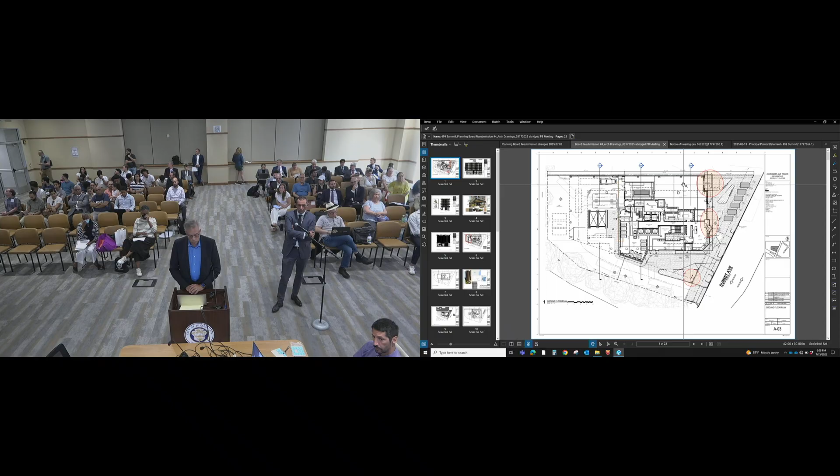This is the ground floor, and what I've circled are the areas where the changes have been made. Towards the top here, an additional retail entry was added. The upper right area here was dedicated for retail - ownership wanted to demise that to allow for the possibility of 2 retail tenants instead of 1. In this area, let me zoom in - we added a canopy to the exterior, which I'll show you in elevation and rendering, and we added a double door retail entry here.

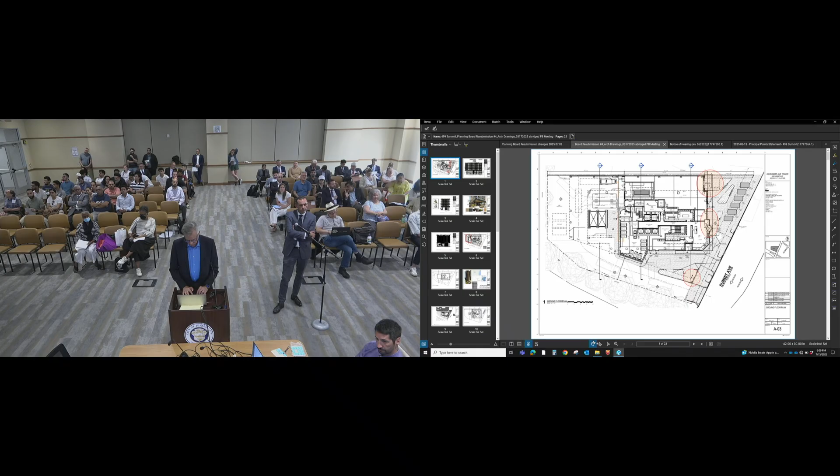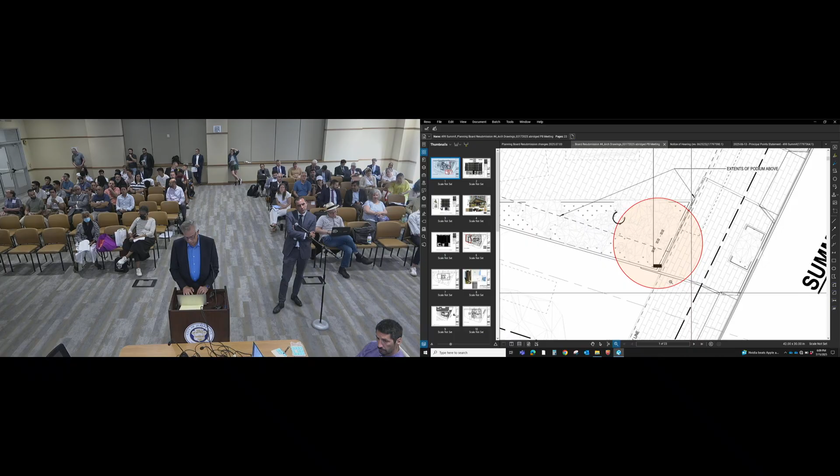Then moving down this east facade, a couple minor changes. Where my cursor is right now is the revised signage that we'll talk about. And this revolving door was just moved slightly so that it's half in, half out of the exterior facade, whereas previously it was all the way inboard. And then finally, if we move down to this area - this is the drop-off, the valet driveway drop-off and entry, and in this island is this piece of monument art, which is part of our signage, and I'll show that in elevation as well.

So if we move to the next drawing, this is an east elevation of the building, looking over the small landscape area to the east facade. To the right here is the added retail entry and retail signage above the canopy. This retail signage and entry was existing - it has not changed. And right here, let me zoom in - this is one of the 2 signs beyond the retail signs that we're seeking the variance for.

I'll just zoom in on that. In working with the branding, graphics, and signage people, they came up with a concept that is much more graphic, much more of a logo.

You'll see the new address 505 here in kind of a stencil cut. So although the area is defined corner to corner, you'll see that with this design, a lot of it is really open area, so it's not quite as big as the overall square footage would suggest.

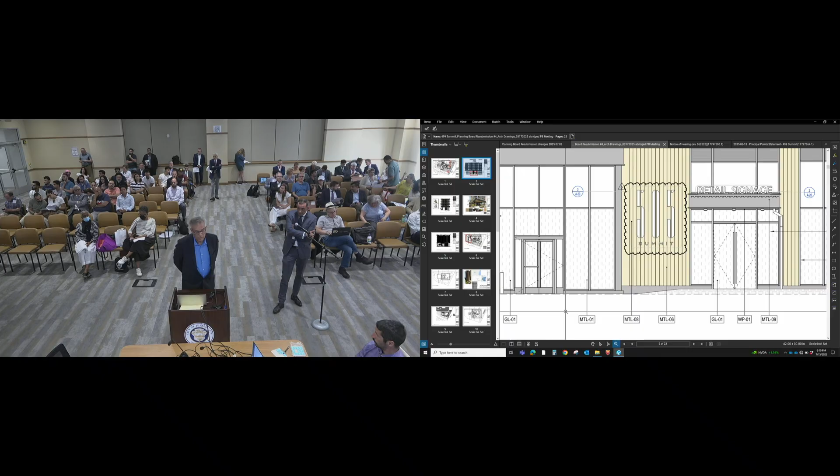Scott, can you talk about how that sign is mounted to the wall, please? Yeah, as is stated in the documents, it's pin mounted. It extends about 3 inches off the face of the building. There's a 1-inch gap between the signage letters and the face of the building, but overall it protrudes about 3 inches.

And that is one of the deviations we're requesting this evening, correct? Because it is not flush mounted, correct? That is correct. And briefly, is that sign lit? It is backlit. It's got a halo effect to it.

And then if we move further to the left, here is where the valet drop-off is, the driveway, and here is the island, and here is the monument sign, or the monument art. It again repeats this same stencil cut vocabulary. It's a metal finish, roughly a light bronze or almost a champagne color. You'll see it in a rendering in a moment.

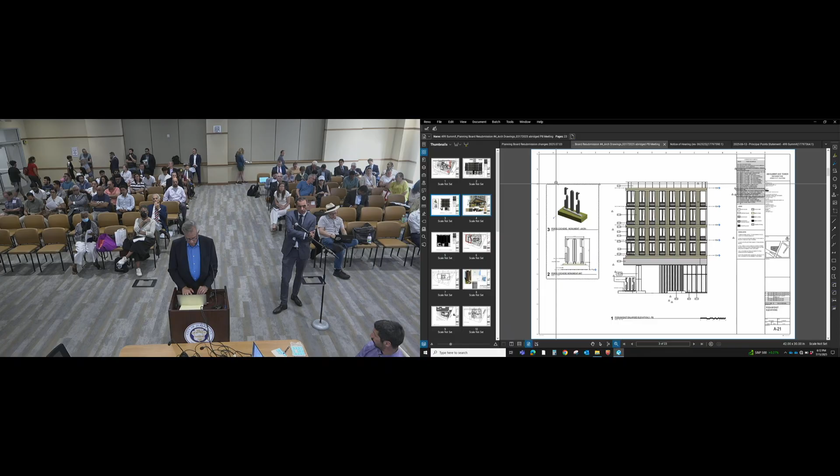And then here's an axonometric presentation of what that looks like. Going to the next sheet, here's a rendered view of what this looks like. In the distance is the new retail canopy. Here's the revolving door protruding out from the face of the building, and then here's the monument art sign in the island.

As you can see, it's very complementary to the overall scheme and color scheme and aesthetic of the building. We believe it's a really nice improvement to the overall appearance from the street. And that monument sign is also one of the deviations we're requesting, correct? That is correct.

That's all I have to show you this evening. I'm happy to answer questions about any of the other elements. I do have the full set of drawings if anybody has a specific question, but they're all minor changes that are either not visible from the exterior or very minor and wouldn't be seen from ground level. Okay, thank you. Any questions from the board?

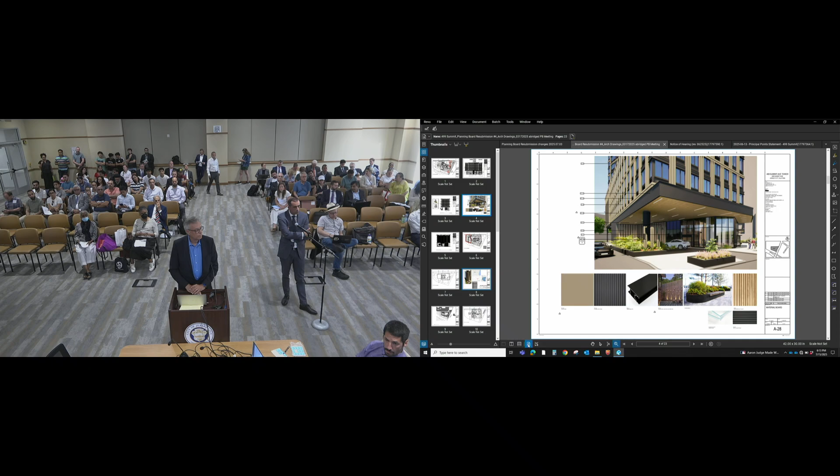Just one, in the written narrative it says the project is proposing an additional retail wall sign for an additional storefront bay as permitted by the redevelopment plan. So that's not included in these renderings, right? Yeah, you don't see it in this rendering. However, in the elevation I showed, that actually refers to this retail sign here. This was not here previously. This retail entry was not here previously. The canopy was not here, and the retail signage was not here. So all of that has been added in this amendment.

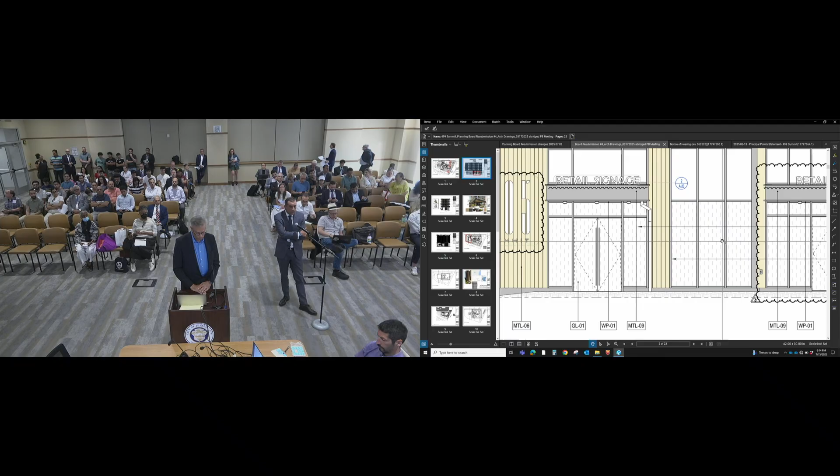And it'll match the design of the other two? Yeah, very similar. If we pan over, it's shown as essentially identical to the signage in the original application. And Commissioner, those are compliant signage per the plan. Should a tenant want to change that, they'll have to petition the city and come back to this board. Thank you, sir.

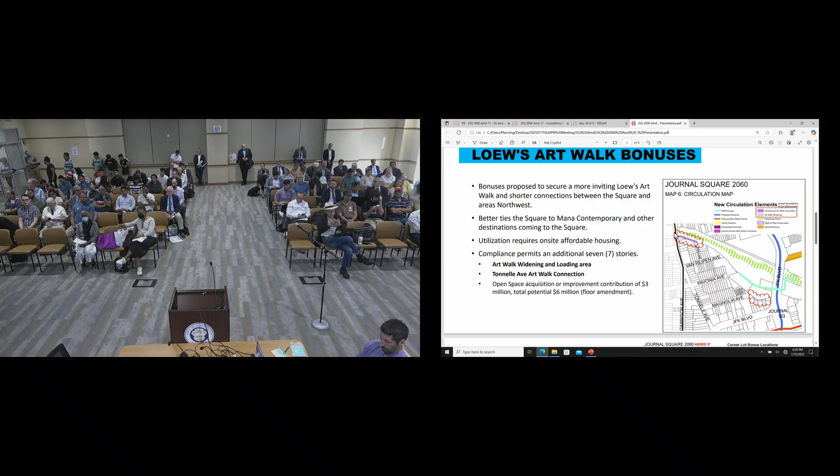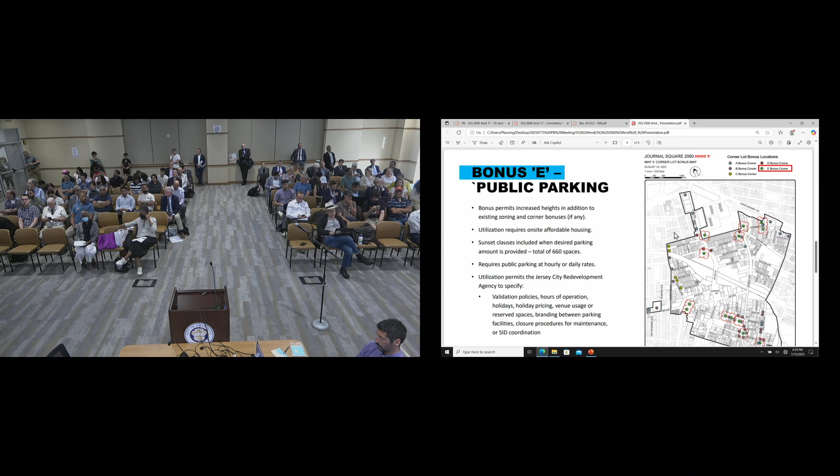When this resolution came to be, one of the items that Councilman Boggiano requested staff look at was a public parking bonus, and so that's incorporated into these amendments. This bonus, known as Bonus E, would permit increased heights for the provision of public parking on site.

This is a bonus that's crafted in a way that would sunset. We're looking for a specific amount of parking, totaling 660 spaces. Once we get to that number, this bonus would no longer be available, even though the map shows it could be in multiple locations. Because it sunsets and the map is populated with all these different options, we don't know where this bonus will be utilized, so we are allowing it in more places just because we don't know who's going to utilize this, or when.

We don't want to see this go on forever, because we think there's a balance we need for public parking. That's one reason the Journal Square 2060 plan has parking maximums rather than minimums. The main goal is to require public parking at hourly or daily rates. Anyone utilizing this bonus would have to coordinate with the Jersey City Redevelopment Agency and specify validation policies, hours of operation, holidays, holiday pricing, venue usage, reserved spaces, branding between facilities, closure procedures, and SID coordination.

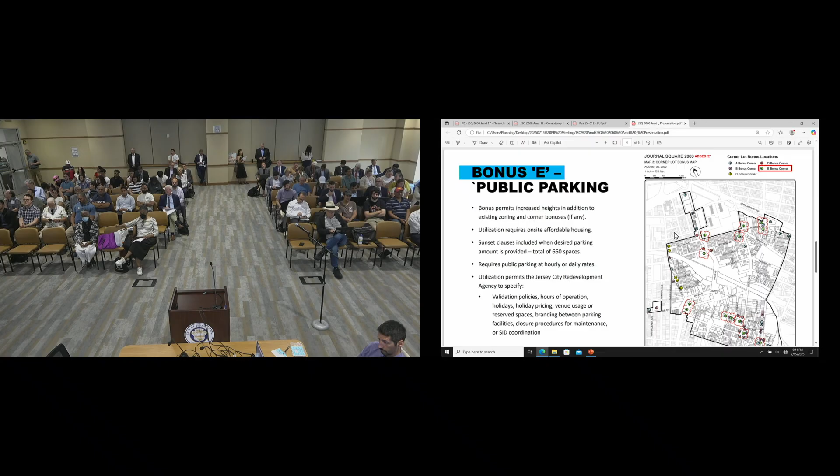I'll explain this last slide before I hand it off to my colleague Matt. We're also making some changes to map 2, correcting for some split lot zones or split lot properties that are under common ownership. Those are referenced in these areas specifically on this map, with bullets to the left here.

In the resolution, it asks us to look at St. John's, roughly this larger area here that I'm circling. This particular site, people would know as developed with a parking lot or parking structure above the Dollar Tree, 3000 Kennedy. This is being recommended to be folded into the Journal Square 2060 redevelopment plan and assigned Zone 3 under the provisions of this plan.

This zone change is a rezoning, so it would require inclusionary zoning, and the existing mandatory affordable housing provisions of the plan require that there would be on-site affordable housing already.

The other areas circled on this map include a bank site adjacent to a surface parking lot, which are separate parcels. We're folding them both into the same zone, Zone 4. There are also areas on Van Reipen folding into Zone 3, and areas on Cottage folding into Zone 3 as well.

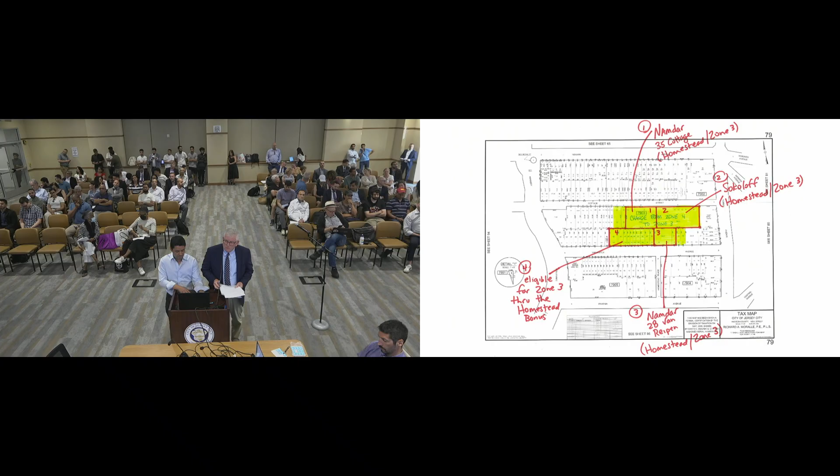Box 1 is the 35 cottage Namdar development adjacent to the Homestead Place extension, which has been developed under Zone 3. So it already exists, right?

Box 2 is what I call the Sokoloff development, another development under the Homestead extension, and the lots go all the way east on Cottage. That also has been developed under Zone 3.

Box number 3 is another Namdar development developed under the Homestead extension bonus, under Zone 3. Box 4 is additional properties, and the two lots fronting on Cottage Street could really be part of that zone, because all of those lots can be developed under the Homestead extension bonus under Zone 3.

I can represent to the board that Mr. Namdar already has some of the lots adjacent to Homestead under contract, or owns them already, so those will be developed under Zone 3. My client's properties are on the western edge there, that front.

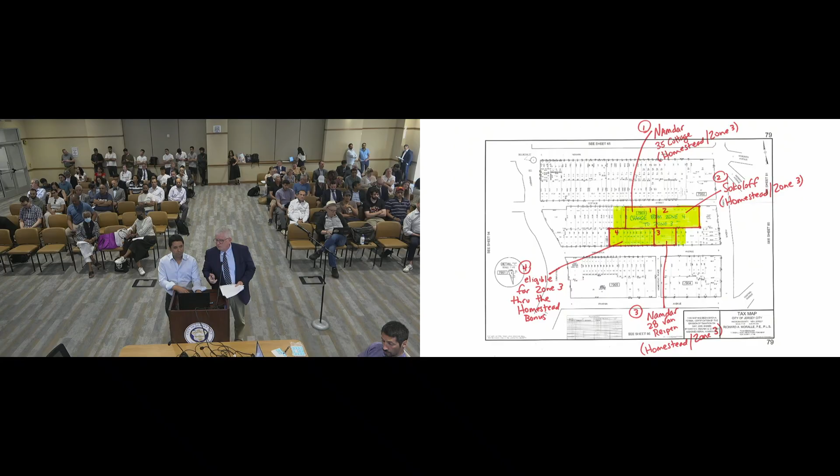Let's go to the last sheet. Yes, that one, yes.

Your laptop disconnected. It's reconnected again. Now it's disconnected. Now it's reconnected, now it's disconnected. Try that again. Just wait, maybe. Oh my God, what happened? It's not going through, I'm trying to correct it.

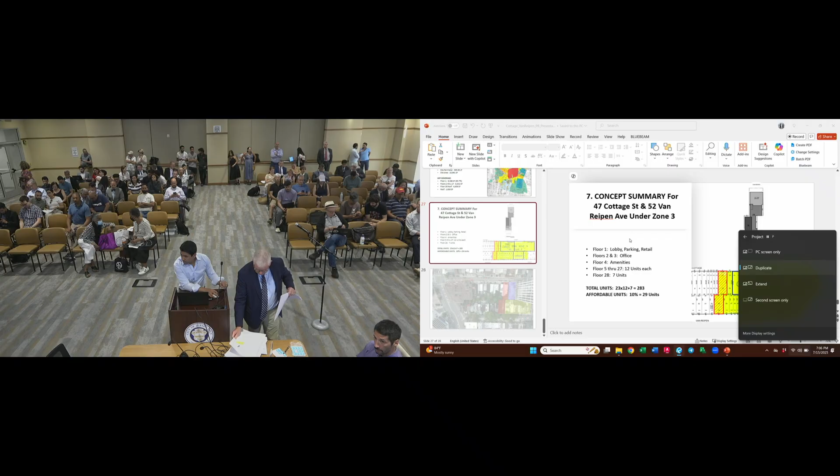Hey, we got it. Talk quickly, sorry about that. All right, nobody touch anything. Leave it.

Council, this is P3? P3. Okay, so you see P3, this is the tax map again, and the red hatched lots are the ones that are owned by my client. So he's on the western edge.

The idea is all of the lots to the east could be developed under the Homestead in Zone 3, as well as these lots if they had a collaboration with Mr. Namdar. But this gives you an opportunity to develop it under Zone 3, separate and apart, if that were the case. So since you have all of these lots in this immediate area already being developed or could be developed under Zone 3, and there are map changes occurring under this amendment, it would be appropriate to make this change as well.

I won't go into the photos of all the projects in the immediate area. I mean, to steal a legal term, we'll take judicial notice that there's a lot of buildings around here that are high, that have been built under Zone 3.

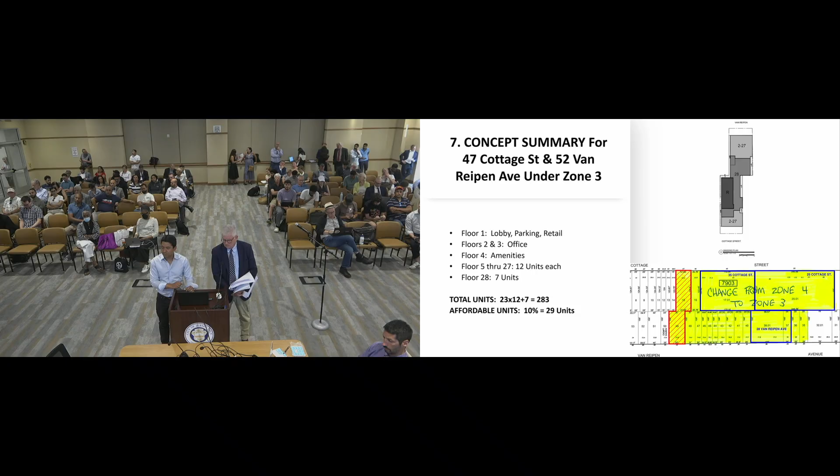This was a resolution brought to city planning by Councilman Boggiano. There were public meetings done, one with the Journal Square Community Association in February and one with the Hilltop Neighborhood Association in February of this year. There were proposed changes that would apply to Zone 4, Zone 4A, Zone 7, and Zone 8, and in discussing it through after those meetings with the councilman, the entirety of the amendments were put at jeopardy.

So staff advised the councilman that we wouldn't move forward with those amendments, which would make broad changes—not changes here that look larger than they actually appear, but are actually very small and, I think, unmeaningful to the future of amendments that staff is considering for this area. Those were removed. I know it was put on the record that Councilman Boggiano supports these, but he also supports staff in making the removal of this and coming back to him with a recommendation, which we did to the board. We don't believe we should move forward with that this time.

We think that, in keeping with what we've communicated with the councilman—and he's communicated that to the neighborhood associations—it's better to hold off on any changes in Zone 4 in this respect. All the homestead projects are immediately Zone 3, with their own special setback and step-back standards. This change looks larger than it appears; it's rather a very small change, and I would even use the word arbitrary. We recommend that the board not consider this floor amendment.

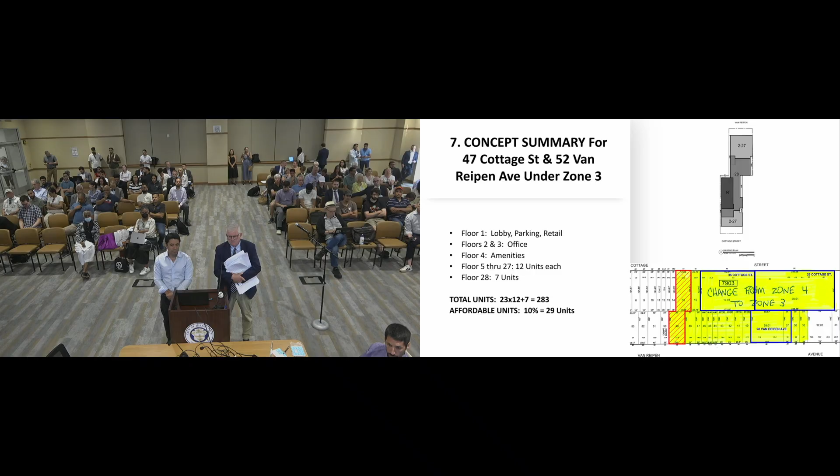Through the chair, if I may, to the attorney, do you know the lot size to confirm? I'd have to, I believe together they're over 9,000 square feet. It's 10,900 square feet.

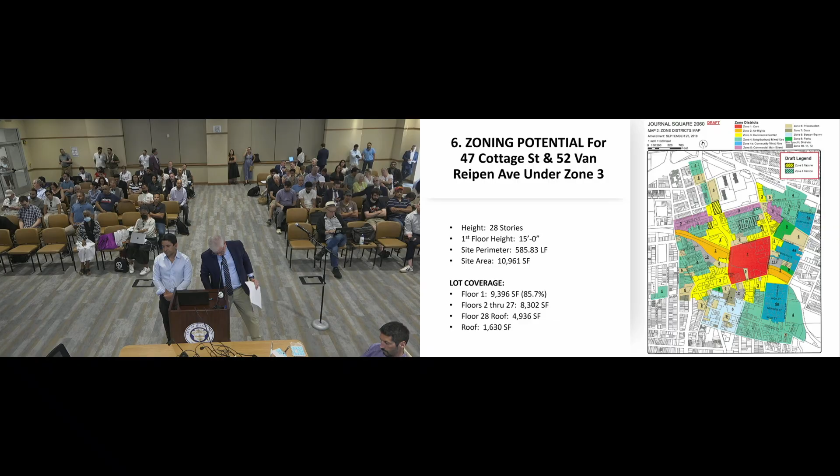And Matt, what's the requirement for that lot size? Under Zone 3, there's no requirement on lot size to be in zone 3. Where there might be some confusion, and what I was saying earlier was that in the provisions that would layer in a mandatory affordable housing requirement in zones 4 and others, not 1 and 3, which already exist in the plan.

There was a threshold that it would apply to only lots 9,000 square feet or more. And the goal of that was to allow for smaller lots to remain as is, because there was a voiced opinion and concern about making sure that there is still a mix of housing types and typologies. So not to broad stroke put on a mandatory affordable housing requirement for a lot that's really small. So the idea was once the lot gets to a certain size, it's better able to accommodate a mandatory affordable housing requirement, which results in additional height to actually subsidize the requirement that is being mandated.

I mean, are we marking this one? Are we marking this sheet? This was not marked. Since it's up there, we can mark it as P4. But they're giving us a little couple bullets here, but they still don't tell us if it's a conforming lot.

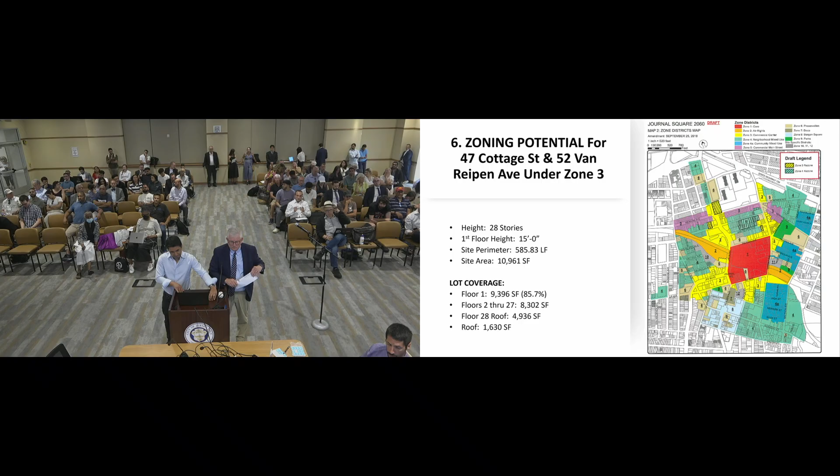Understood. I think we have the benefit of the opinion of our planner. We've heard council's comments and the requests of the interested party. I think we open it up to the public. Anybody else from the public, and then the board can make whatever decision the board is comfortable making. Thank you, counsel. At this time, I will open it up to the board.

Is there anyone here from the public to speak on this? Seeing no one from the public, I move to close. Okay, the public is now closed.

Staff would recommend that the board consider the amendments with the floor amendments as presented to the board here tonight for approval and recommendation to council. To be clear, that means the refined text with the blue highlights for the Loew's Art Walk bonus, as well as the version of the corridor bonus map that adds what is known as the Seth Martin site on Hoboken Avenue near 139 as an appropriate site for corridor bonus density. Those are the changes between the documents that were made public 10 days ago and the floor amendments staff brought tonight.

Thank you, Matt. I'll entertain a motion. Motion.

So Chair, I would like to entertain that motion for case P2025-0122, and to add the floor amendments that was presented to the board as well. Just want to make clarification. Are we including the floor amendments by staff or by the public? Both? They're oppositional, right? It would have to be one or the other. The motion made by the vice chair is for the floor amendments by the board, including the amendment proposed by the member of the public, to add the specific property into Zone 3. Is that the motion you want to bring forth? Correct, that's the motion.

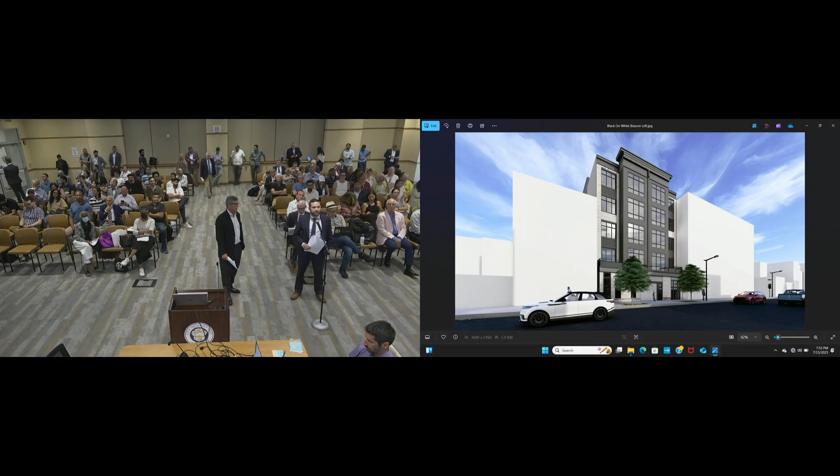What we're proposing is a 5-story development consisting of 14 residential units above 14 parking spaces. We have two areas of relief this evening which are a little unique. Specifically, our rear lot line is a diagonal. This was originally envisioned as an entire whole block or half block redevelopment, but because we are fronting along Beacon Avenue, our rear yard is a diagonal lot line, leading to a minor deviation from the redevelopment plan on the ground floor and the upper floor.

On the ground floor, one side is permitted a 0-foot setback in the rear, and the other side is required a 5-foot setback. We have 4.67 feet, so that's a 0.33-foot deviation to kind of square off the building.

On the upper floors, same idea. One side in the rear requires a 15-foot setback, and the other side requires 20 feet. We have 15 feet flush across, so on the upper floors it's a 5-foot deviation, again to keep the rear of the building straight across the back, as you'll see.

The only other deviation we have is for the drive aisle width internal to the building. 22 feet is required under your land development ordinance, and we vary anywhere from 20 to 22 feet. To be conservative, at that pinch point we are at 20 feet. That's it in terms of deviations. Otherwise, we are fully compliant with your redevelopment plan.

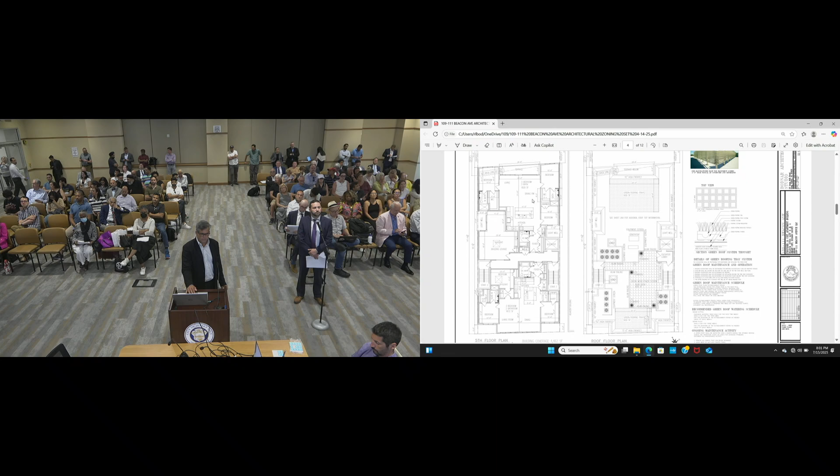We also do have an amenity space on this level. It's about 300 and maybe almost 400 square feet in terms of size overall for the entire building to use. And on the upper level, we have a 600 square foot roof deck on the roof and 864 square feet of green roofing.

That's pretty much the gist of the presentation. I don't believe we have anything else really to be added to this project this time. Yeah Russ, thank you, that's all I had for you.

Thank you, Mr. Bodnar. Do we have any questions for Mr. Bodnar? Yeah, I have a question. Dr. Desai, can you show me all the 14 parkings you have?

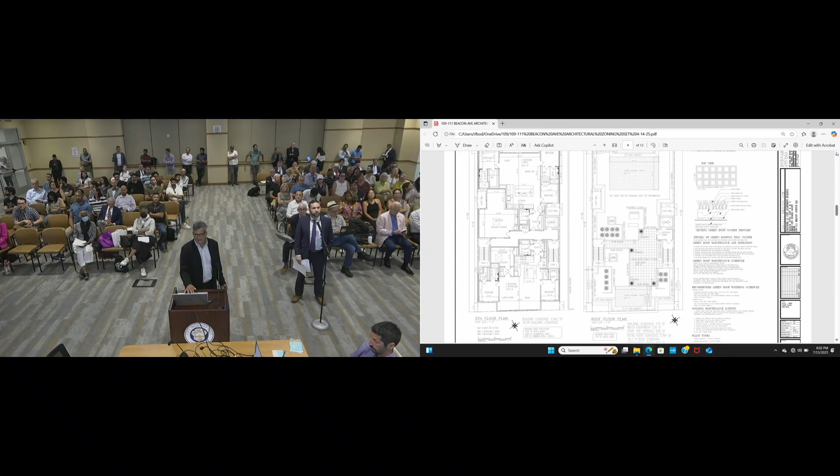Yes, there's actually a stacking parking system, so you're probably confused if you look at them and just count them. So let's go back.

So as you can see here—oops, flying past it, sorry guys—you have the 3 parking spaces in the front, these 3 here. And then we have the handicap one as well, but then we have the stacker parkings right here: 1, 2, 3, 4, 5. So they're doubled up. That's really not 10 because it's a stacker that has a rotating system.

So you only get 9 out of that, and then you get the other parking space. So you get the 14 between those and the 2 that are actually parallel on the side. And I gave a little turnaround spot back here so you could pull in — when you have the stacker system, there's actually an empty spot always to pull into. So you pull into that spot and you can always back. If these people pulled up, they could pull into that space, and then they could back themselves out so they have an easier way to get in and out of the actual parallel parking spaces as well.

That was the second reason I used that type. The garage door has an alarm system on the outside of the building, and I always put a rotating disc light on all my projects, so if a pedestrian is walking by when the door becomes active, the rotating disc alerts them as well.

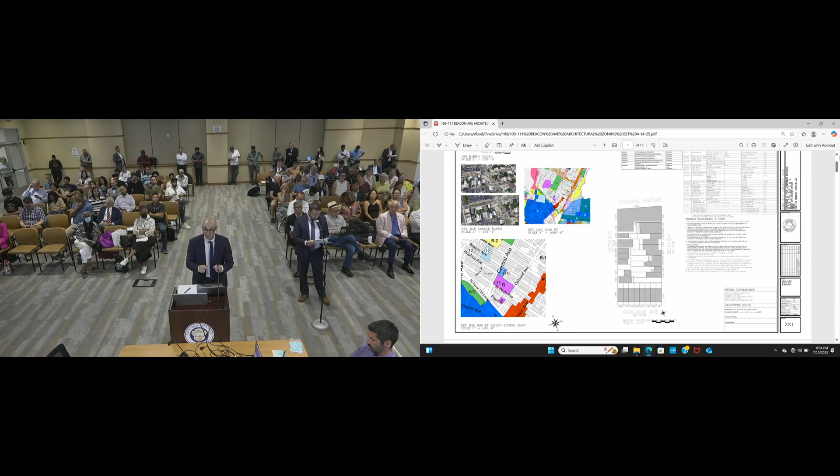Yeah, I do agree. I think the board has a good handle on the specifics of where the deviations are occurring. I just wanted to note that the 20-foot dimension for the drive aisle is associated with the compact spaces, while 21 feet 8 inches is associated with the standard spaces. That drive aisle at 21 feet 8 inches is only 4 inches short of the compliant 22 feet, and it will still provide adequate circulation for the standard vehicle.

We also covered the rear yard setbacks on the ground floor and upper floor pretty well. What I wanted to offer this board is that we are in the Hopkins Central Redevelopment Plan. You may ask yourself why an application on Beacon Avenue is within that, and really it's a matter of these being the last two parcels of the overall redevelopment plan being presented to this board. The other parcels in this redevelopment plan were previously approved and are under construction.

I believe the building is topped out and cladded, and it does look nice per those plans. I was involved with that application years ago. What we're dealing with now is a requirement in terms of rear yard for the redevelopment plan as a whole, and it was associated with a different lot line. When we make this application, our lot and orientation is different from the whole redevelopment plan, so we have an interior lot as opposed to a corner lot, which is what the redevelopment plan addresses.

Because of that, we're applying these rear yard standards to what is the subject property's rear yard. I do think, from a light and air and massing standpoint, we've balanced what the proposed development is by applying that rear yard standard to the interior of the overall block. So I do think we're still meeting the intent of the rear yard setback requirement and providing light and air to the interior of the lot.

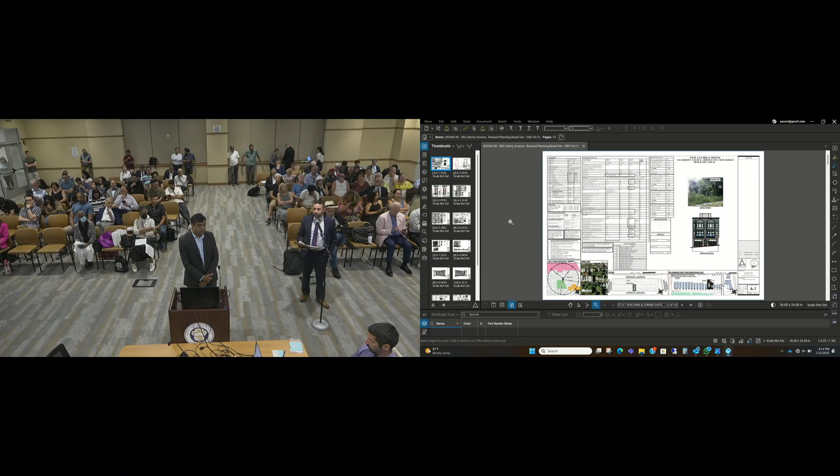With me this evening, I have one witness for you, Avart Patel, who's our project architect. As I indicated, we do not have any relief needed, so I do not have any planning testimony for you this evening. Thank you, sir.

Yes, I do. Avart Patel, Aavart Patel. Mr. Patel, you've presented in front of us before. Yes, I have. Your license is current, correct? Yes. You're qualified. Thank you. Thank you, Avart.

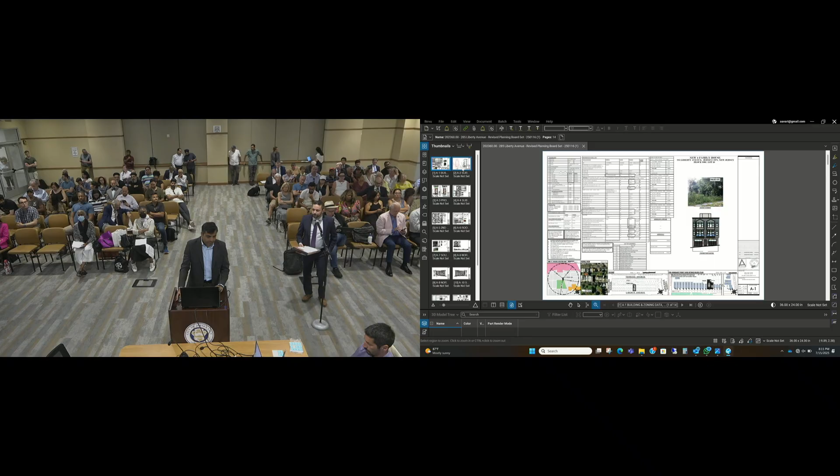So why don't you walk the board through the existing conditions as well as what we're proposing on the site this evening? Sure. The site is located at 285 Liberty Avenue. The width of the lot is 39 and a half, 100 feet deep. The current condition of the site is a vacant lot, and there's a slope front to back, about the site drops about 7.5 feet.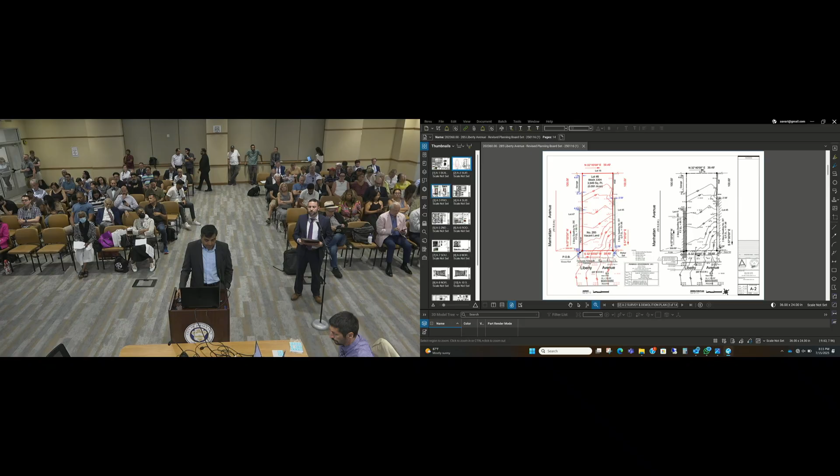Going to quickly move to the proposed site plan. As you can see, the building is situated with a 3.5 foot setback on both sides, and on the front side we have about 3.5 feet of setback. Going to go to the floor plan.

The proposal is for a 3-story, 4-family structure. And we are proposing a 2-car garage, and that would be assigned to one of the 2 larger units of the building. Going to quickly go through the first floor plan. As you can see, the garage doors towards the front, and then there is a staircase centrally located, which leads to the 2nd story. Unit number 1 and unit number 2 is placed towards the back, and those are the larger units, and the garage would be associated with those units.

So units have access through the garage, and at this level we have a master bedroom with a walk-in closet, and utilities located. There is a staircase leading downstairs and upstairs. And I'm going to quickly cover the downstairs. So the staircase comes down, and there's a walkout door, and that they would get the access to the backyard.

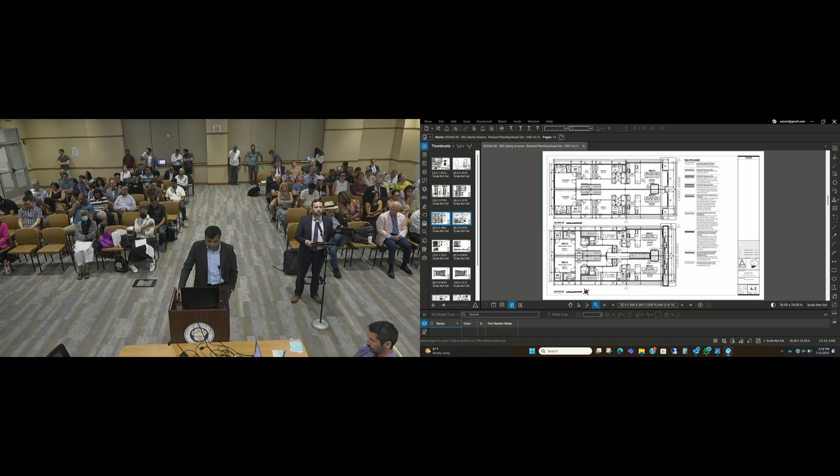And then the central staircase, which is placed between the two garage, would come up, and then we'll have access to the Unit 3 and 4. Again, they are duplex as well, and at this level, there's a master bedroom with some utilities, and then the staircase will lead to the third level, where the additional bedroom and living and kitchen is located. Identical layout, just split in half.

Overall areas of these two units are about 1,580 square feet, and then the two larger units are about 1,700 and change. Going to quickly move to the roof plan.

Unit 3 and 4 gets access to the roof as Unit 1 and 2 had access to the backyard, so that way everyone has access to the outdoor space. The green roof is located towards the front and the back of the building, creating a separation from the edge of the building.

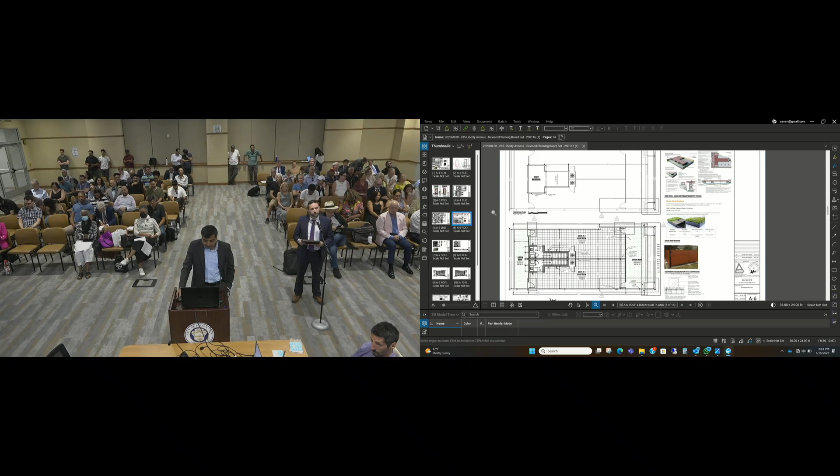And this is the bulkhead plan showing the roof of that staircase. Quickly go to the front elevation.

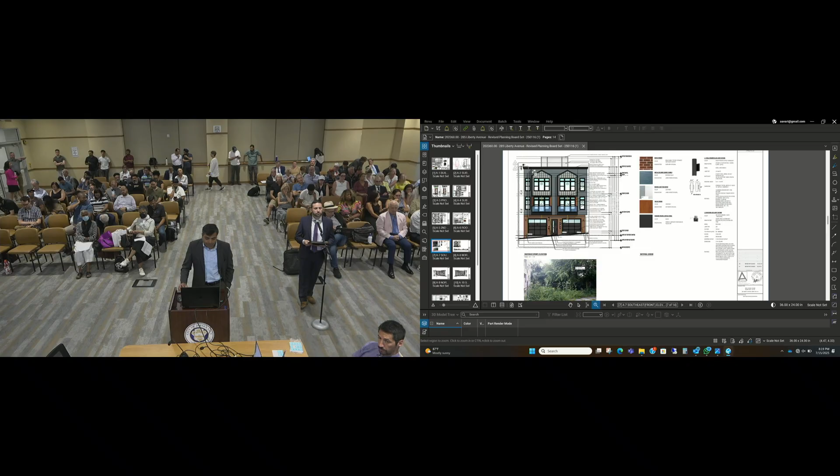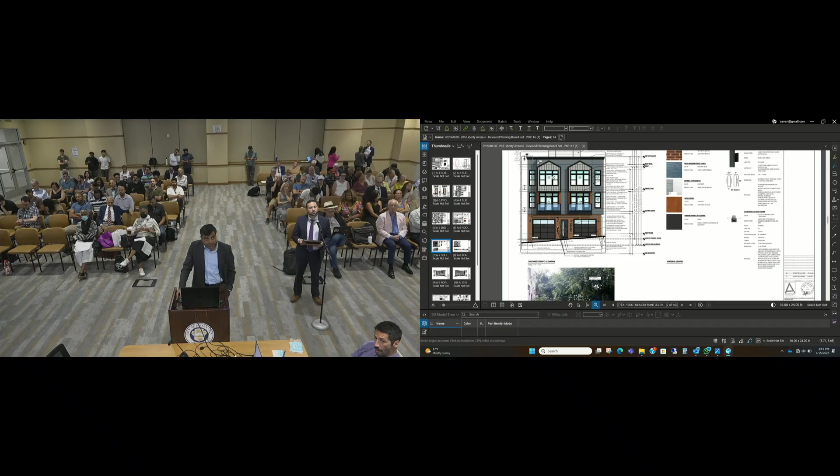Most of the lots along Liberty are 25 by 100 lot, and we wanted to create a design which gels with a 25-foot lot. So we came up with this module where it looks like a twin, and overall elevation-wise, we are proposing a brick at the base of the facade, and then the background would be all Hardie siding. And then the roof, the shed roof, and the window, that element comes out a bit, about a foot from the main facade, and that would be covered with a board and batten siding.

The railing you see here, the glass goes all the way down to the deck of the balcony. It's not actually a balcony; it's a Juliet balcony, so there would be a railing directly in front of the door and the window. As I said, the glass will go all the way down to the deck, so there's no issue of anything falling or rolling under the glass and hitting someone underneath.

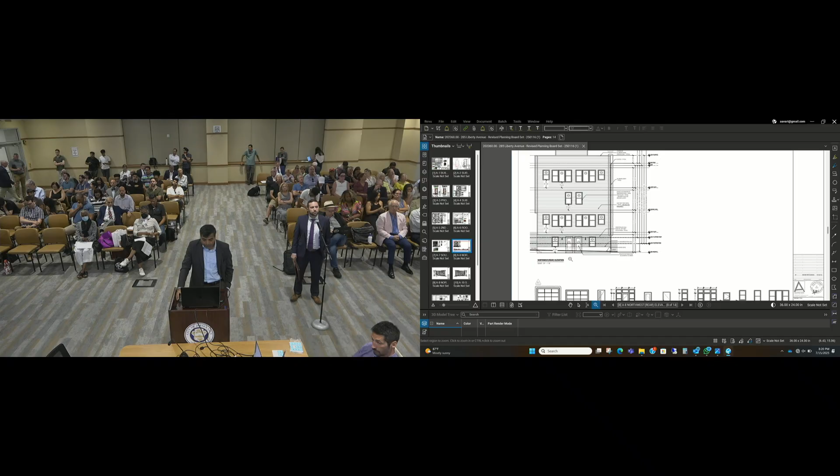These are the side elevations. As you can see, the site gradually slopes down, and we are proposing a few steps and long landings to gradually transition down towards the back.

This is the other side elevation, the left side of the building. The facade would be horizontal siding, which would continue on both the long side as well as the back of the building.

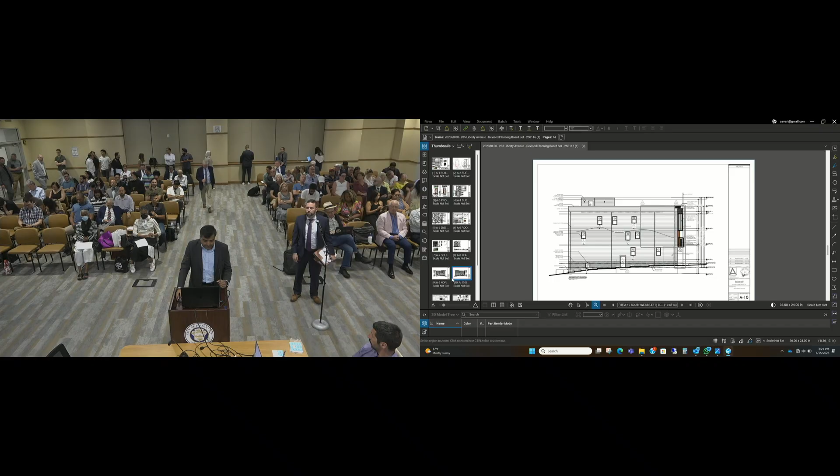I guess that's about it. I'll answer any questions if you have.

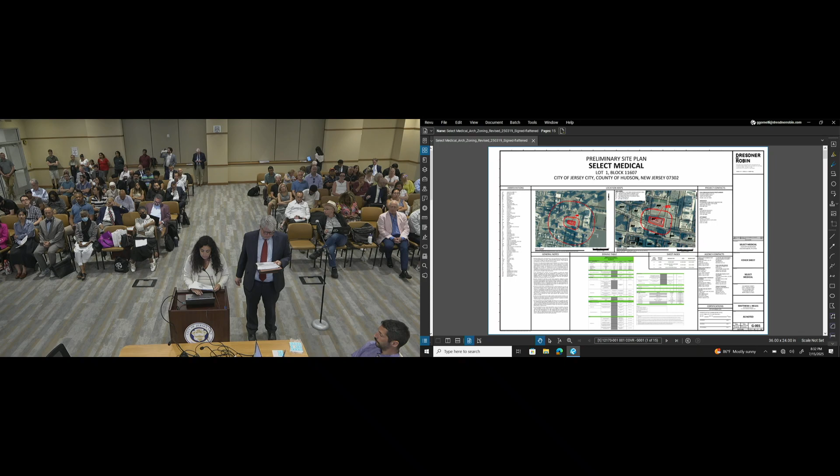And these are the civil drawings that were uploaded on the portal. So this is the cover sheet. I'll flip to the first page, which is our civil site plan. Like Mr. Lean said, the facility is taking over space on the 9th and 10th floors, approximately 50,000 square feet on the 9th floor and 30,000 on the 10th, as well as some adjustments on the interior on the ground level for access. There are no new curb cuts being proposed.

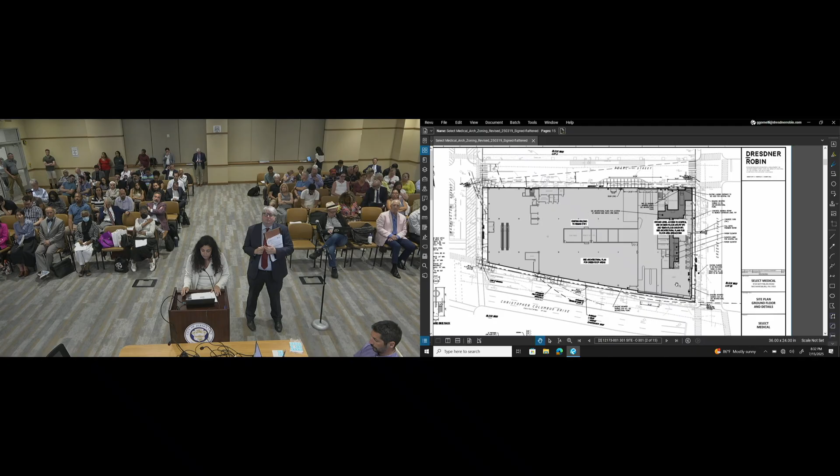The existing loading space on the north side of the building is being used. That's where patients will enter the facility. 2 of the elevators will be modified so that you can enter those elevators from that loading space in the access corridor on the west. Currently, the elevators all go to the office lobby, which is located on the corner of the building. One of those elevators will remain for visitor access, who will access from the lobby, which is on Green Street.

The site improvements are very minimal on the project. There will be some minor sidewalk repair because the facility requires a new water line. And we are proposing some exterior bike racks, 3 bike racks which will hold 6 bikes, which comply with the bike requirements for the building, as well as 2 interior bike racks, which the architect will speak to, as well as the signage, which is proposed on the south, east, and northern facade of the building. And there is the loading variance, which I believe 2 loading spaces are required, and I think we have 1. And, you know, that works with the operations of the facility.

We do also have a GAR, green area ratio, variance. The GAR is required on this site. The variance is requested because, and Charles will get more into this in his planning testimony, in looking at what can be done on this site, it's an existing building. The building takes up 90% of the lot. There are some landscape improvements in the form of some street trees and some planting around the building. We took a look at that and did a calculation. The existing GAR on the site is 0.04 when a 0.25 is required. We looked at the square footage we're taking up in the building, and we're adding 4,100 square feet of green roof on the roof, which accounts for an additional 0.05 GAR, for a total GAR on the site of 0.09. We believe that 0.05 is appropriate because it equates to the percentage of floor area we're taking in the building. Obviously, being an existing building, there's little that can be done when the building takes up the majority of the lot, and there's multiple uses in the building.

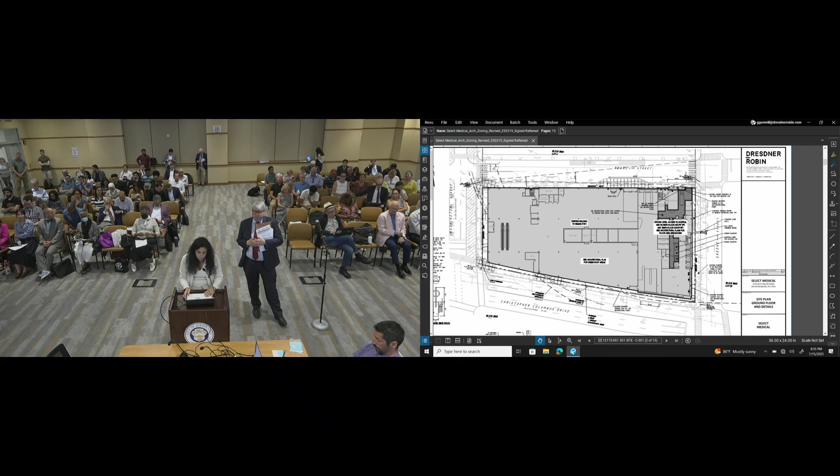That is really all of the engineering testimony. My final sheet is just my utility plan showing that proposed water line I mentioned earlier. The only other question I have, Ms. Garnelli, is we're not changing the parking layout in the building, and it complies with the needs for this proposed use? Yes.

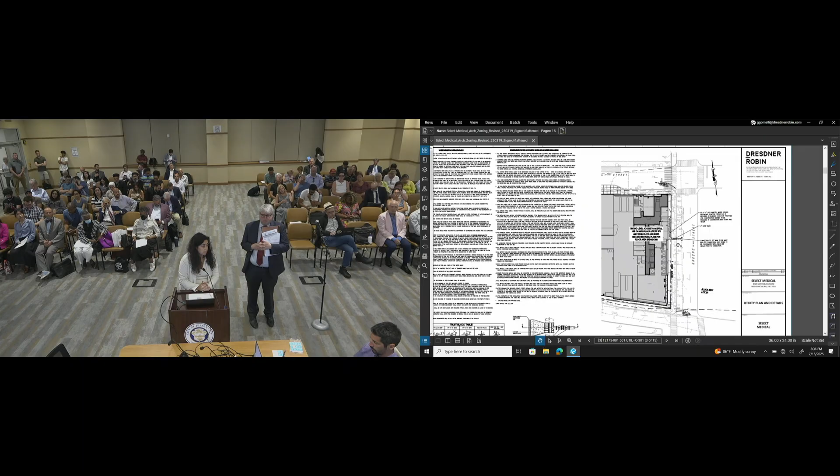Thank you, Ms. Garnelli. Any questions for her? Well, on the agenda it says the required number of off-street loading. I've gone to that garage numerous times to go to Whole Foods, and it's plentiful, so that I don't see as a problem. Maybe it's just a typo. But the other thing is with the loading, it's 2 spaces on Pearl. It is off street, the entrance is off Pearl, and it's within the building, on an existing curb cut. And then it'll be designated as such. It will be designated. Okay, any other questions? No. Okay, thank you, Ms. Garnelli. Thank you, appreciate it.

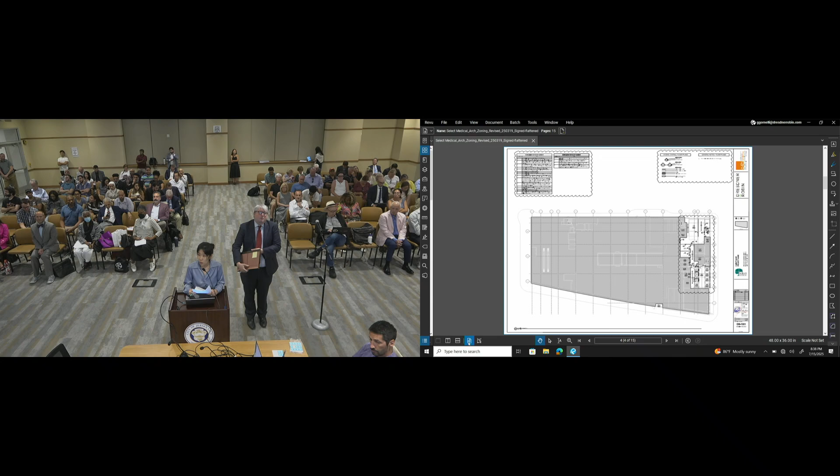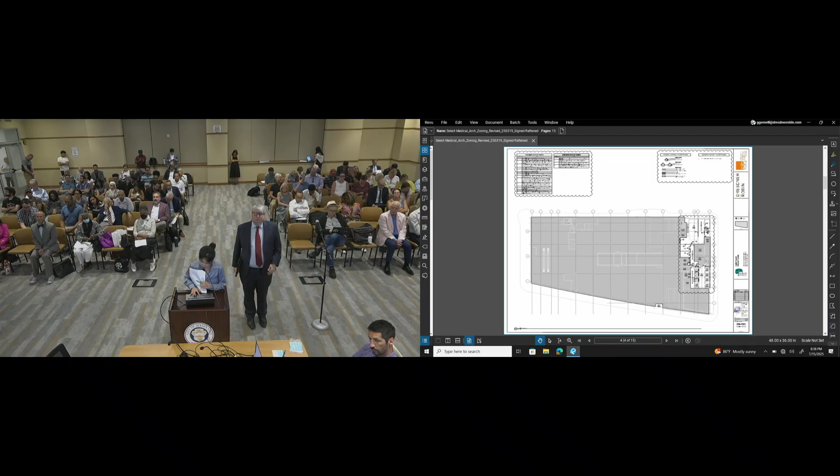Currently on screen is the demolition plan of the existing building, as Gabby just mentioned. You see the existing two loading docks here. We are converting the back into an ambulance drop-off dedicated for the rehab hospital, and we are demolishing the three passenger elevators to provide two new hospital-grade elevators.

For level 9 and level 10 existing space: on level 9 is office space, and we are doing a gut renovation. On level 10, existing space is a data center and associated support for the previous TD Bank. We are doing a gut renovation there as well.

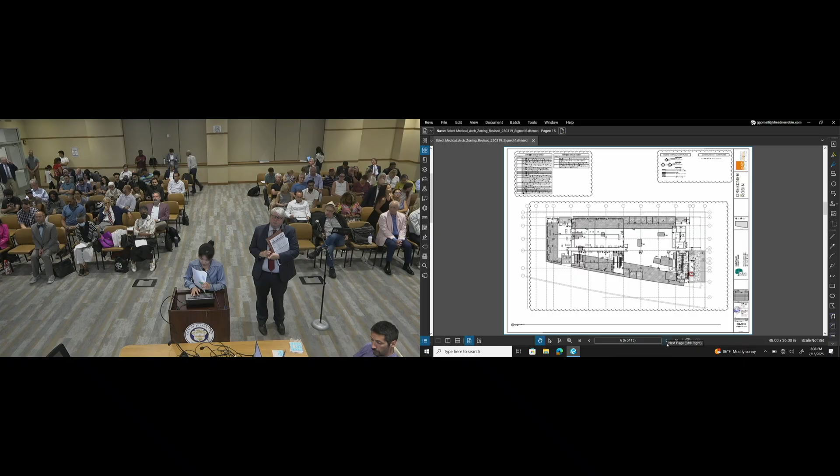I'm going to show the department plan, which represents the new layout. As you can see here, we are providing a new ambulance drop-off, which has an exterior flashing light with a beacon warning system to warn pedestrians when the ambulance goes in and out.

As you see, highlighted in green are two hospital-grade elevators compliant with FGI 2020. They will be transporting patients from the back area into the hospital-grade elevator, while the other passenger elevators remain for public visitors from the main entrance on Green Street.

This is a related scope when we upgrade the elevators on the parking levels. So when I go to the next slide, this is the new layout for level 9.

As you can see, highlighted in blue is the perimeter with the inpatient rehab patient care unit. In the middle is all the support, including a kitchen for patient nutrition support, a gym for patient rehab recovery, and some admin space with a nurse station and support like clean supplies and soiled utility room.

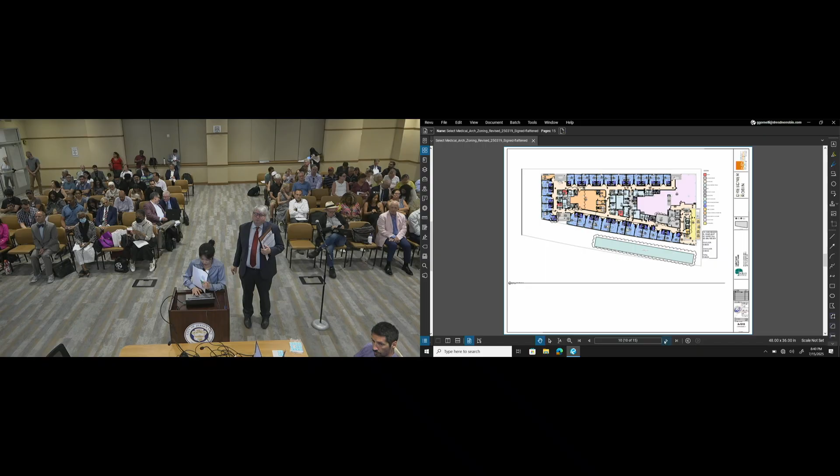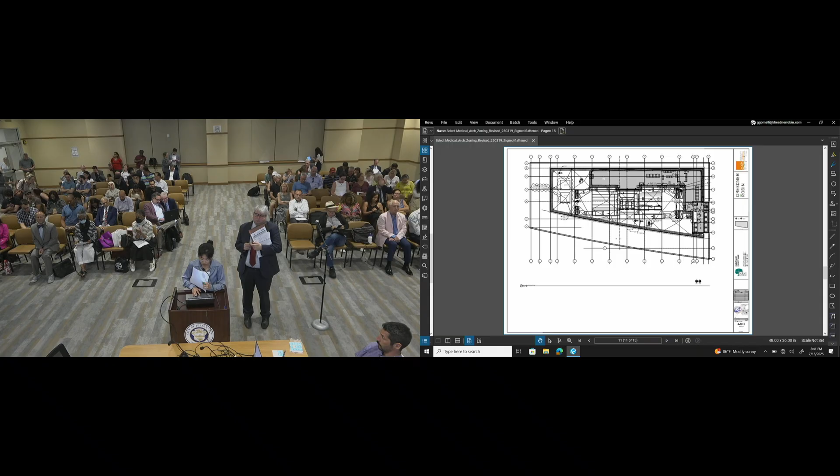We're also providing an adjacent 33-bed patient care unit along the perimeter with a central support space. On the roof, we will provide two seismic reserve water tanks to suffice fire protection for the high-rise building, utilizing the existing screen system.

As you can see in the rendering here, I'm going to represent the proposed exterior signage here with the facility's name. This is Green Street, and this is the main Christopher Columbus Drive. You can see the existing building has a curtain wall at the top from level 8 to level 10, and below is the parking garage, with Whole Foods at the corner.

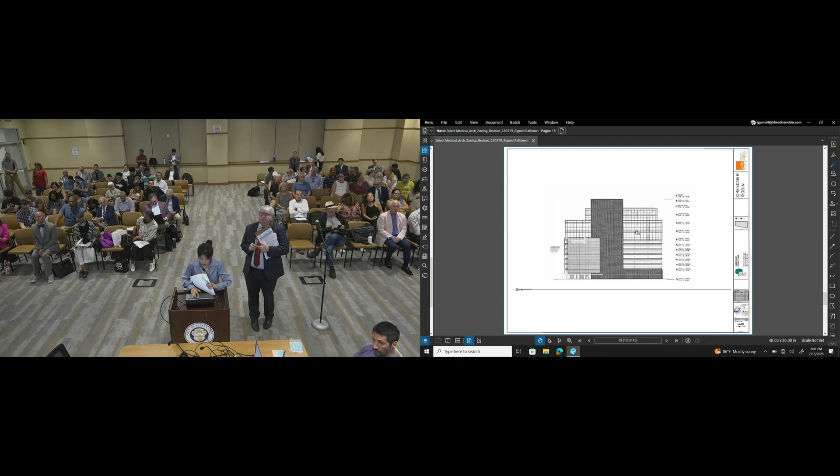So this is the proposed facade elevation. You can see this is within the required maximum limitation of the exterior signage. There is no change here - this is Green Street, and this is the proposed Kessler Institute exterior signage.

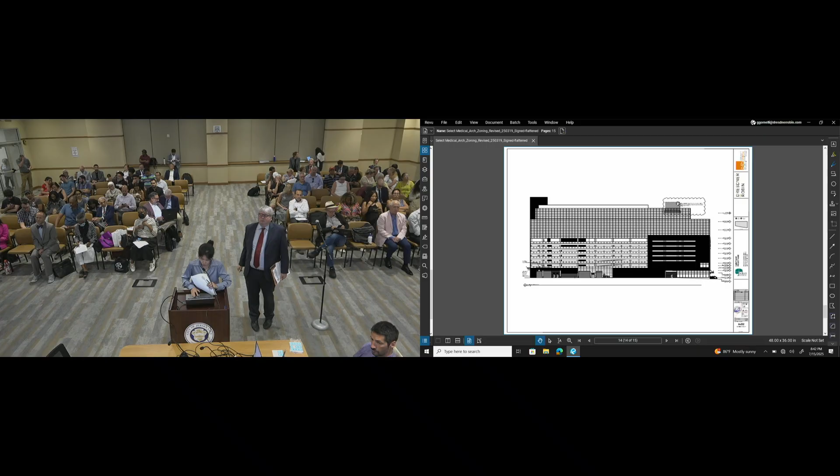And this is the back area, Pearl Street for the seismic reserve water tank with the screen wall. And this is the Whole Foods main entrance street with the water tank with the screen wall.

I have no questions for this witness. Any questions for Ms. Liu? No. You did great.

Thank you. All right, I'm just going to follow up with Charles Hyde to finish. Counsel, do you want to have Mr. Lewis testify that he reviewed those plans? Absolutely. I don't think he actually did that. That's true.

Mr. Lewis, you had a chance to review these plans with Ms. Liu? Yes, I reviewed the plans with her, and I actually went through her testimony with her as well. Okay, and they meet the standards under the state of New Jersey? Yes, absolutely. Thank you. Thank you, Counsel.

Mr. Hyde, good evening. I'll remind you, you're still under oath. Still under oath, glad to still be here. I'll jump right into it. Again, happy to be here, Board.

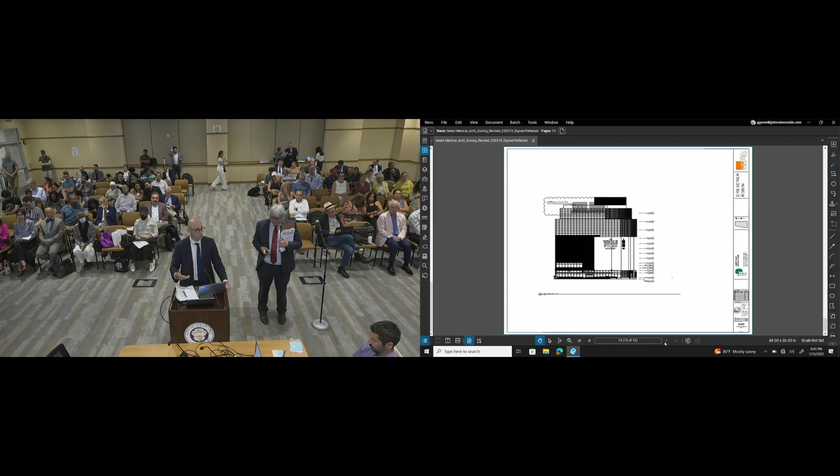So we had the pleasure of working on this, which is really an adaptive reuse of office space. There's clearly a vacancy of office space in the city, and this is a really nice project to introduce what I would consider an inherently beneficial use. We're not seeking any inherently beneficial use deviation or variance tonight. The plan, Exchange Place North, was actually amended in 2024 to introduce hotels and long-term care facilities as permitted principal uses. So that was done.

What we are doing is really cleaning up a little bit of the aesthetics with the signage, presenting some of the coordination with the loading that's occurring, and of course the green area ratio. I want to mention that all of this variance relief is from the general land development ordinance, not from the specific redevelopment plan. We actually comply - the existing structure complies. There's no increases or changes that would create any sort of deviations from the redevelopment plan. So again, the relief being sought is from the general zoning ordinance.

I'll tackle the signage first. There are a number of signage variances that we presented, and the project architect did walk the board through the facades, which if I do this correctly, might be able to get back to - and I'm not doing it correctly. Okay, one more. Thank you. So this is a good image and location.

There's a number of variances, again, from the general zoning ordinance. Number of signs for hospital uses permitted is one. For hospital use, this hospital use has 3 frontages. We're identifying 1 sign per frontage. 2 of the frontages will have the branding of Kessler Institute. The one shown on sheet A200 will match in terms of consistency and aesthetics with the Whole Foods sign that already exists, and there's one on Green Street. The 3rd sign is on Pearl, which is the ambulance entrance identification signage - an important entrance to the building, helping any ambulances coming to the building know where that loading area is.

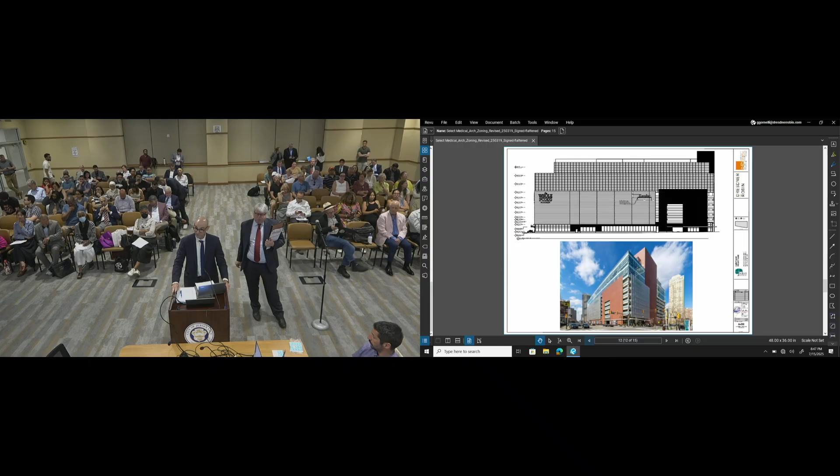The other signage relief needed is in terms of area. The general zoning ordinance only permits hospitals and medical uses 50 square feet of signage. What's being proposed to you are 2 signs with the Kessler Institute signage at 193 square feet.

So let me put that into perspective for you. The overall facade on this structure is approximately 52,246 square feet - it's a large building in downtown. That equates to 0.4% of signage to facade. When you take it into just the first story on Christopher Columbus, it's 33%. Usually anywhere from 5 to 10% is a comfortable number of square footage of ground floor retail signage that you'd find in the city. Again, I do that math just to provide the scale for the board - it's a much bigger facade. On a smaller facade, it would just look out of proportion, but again, we do need relief for both those sign areas.

When you move into the other two aspects of the variance needed with respect to off-street loading, we have worked extensively with the owner of the building and the other uses to identify the parameters of the existing loading and what the hospital needs in terms of loading, not only for ambulances, in terms of the dock, the space, and also the coordination and location to the elevators, but also with any sort of delivery of materials and supplies for the facility.

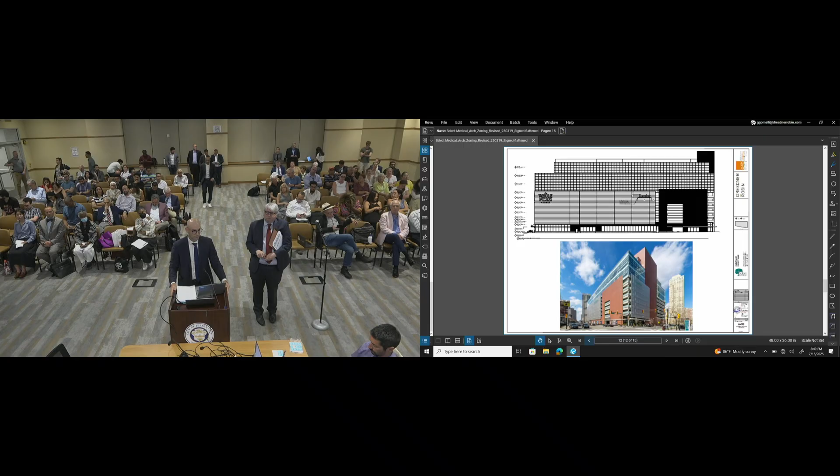And lastly is the green area ratio. Again, we're in the downtown, as Ms. Gordonelli said. The downtown is in a floodplain along the Hudson River. When you have a new construction development, it's the goal of every project to comply with the green area ratio. Here we have an interesting condition where the building occupies almost the whole block, but for the sidewalk. So we are trying to introduce elements to increase the permeability of the project.

And I do agree with Ms. Gordonelli, we did approach this in a creative way, a fairness way. It's not uncommon with a lot of infrastructure improvements where you pay your fair share of contribution to those improvements, and that's very similar here. We utilized the gross floor area of the overall structure and took a percentage of what this application is proposing, and that's the percentage of green area ratio we're complying with. A deviation is required because we don't meet that 0.25, but I think it's an appropriate deviation to request to this board for the reasons we've given, and it's an improvement over existing conditions.

So, with respect to special reasons, I started off the presentation noting this is an inherently beneficial use. I do believe we're a permitted use, but by approving this application, you're introducing an appropriate use for the general welfare and safety of the downtown neighborhood. That's purpose A. I also believe we're providing a desirable visual environment with the proposed signage being offered tonight, notwithstanding the relief. I think we're working in context with the scale and the existing signage on the building today.

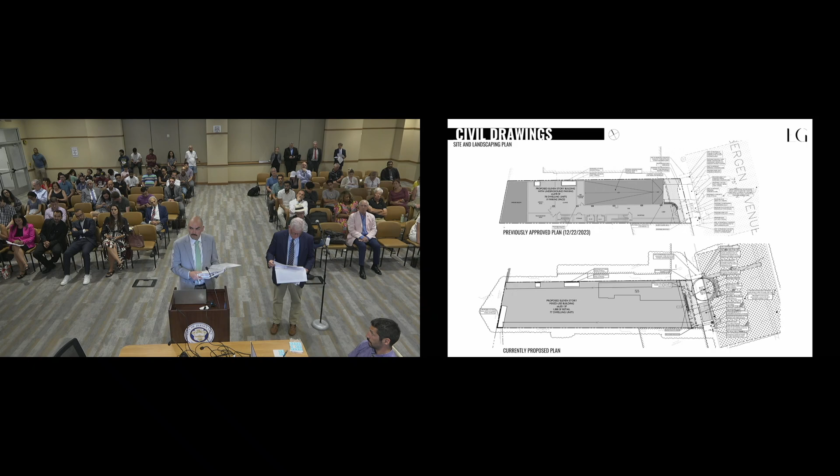For the landscaping, we are proposing one street tree along the frontage as well as some raised planter beds. We think that this is a very positive rehabilitation of the site from its existing condition to something that will be a nice addition to the community.

I'd also like to add that I have reviewed all of the staff reports, the engineering letters, as well as the planning review letter, and we take no exception to any of the comments that were made as far as the engineering and planning comments. As far as my direct testimony, I think that mostly sums it up, and I'm happy to answer any questions from the board.

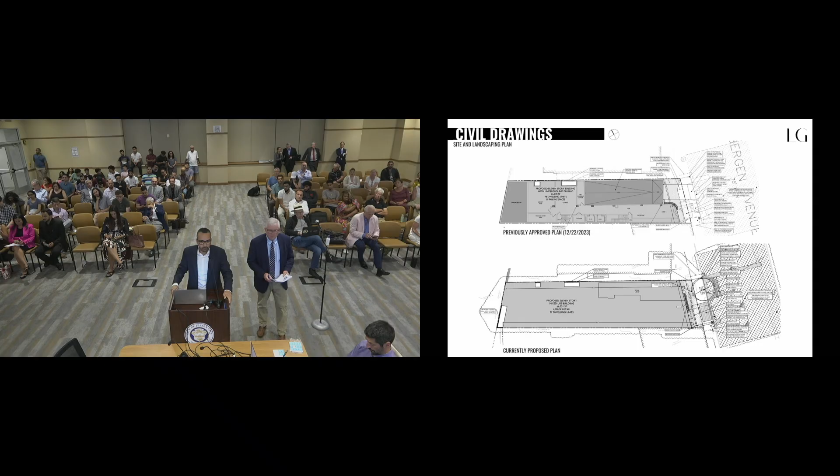I do. Sure. Ahmed Emara, last name Emara. You got it. Mr. Emara, you presented to our board before. I have, and your license is current. Current and good standing, yes. You're qualified. Thank you. As Mike mentioned.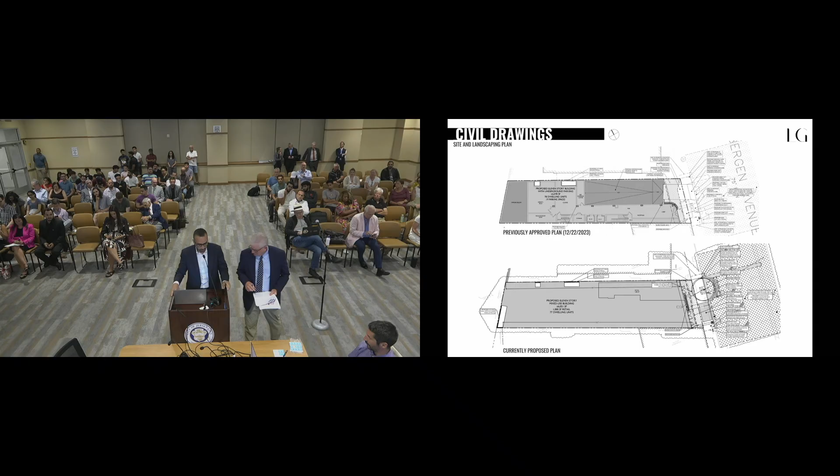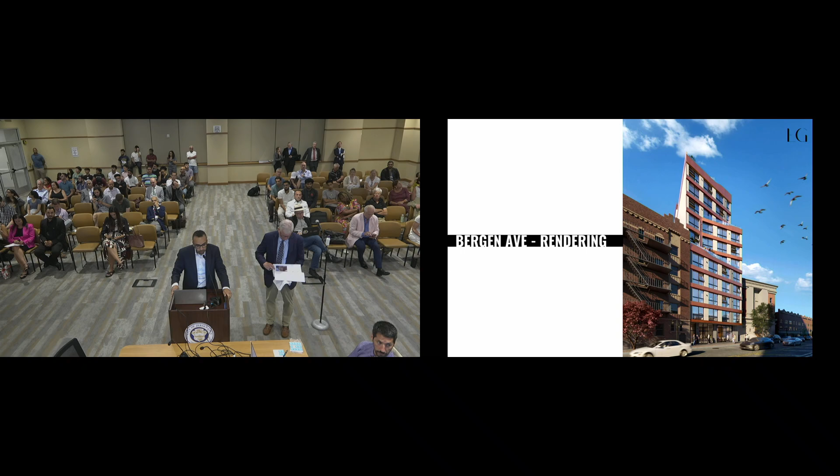This is almost identical to the project that was approved a year or two ago. This is the project that's being proposed now. The massing in the front has remained largely the same. The materiality and the windows have changed slightly just to comply with the new zoning. The new zoning does change the setback in the front, so we are matching that as well, but the variance is being asked for the rear setback.

We are in the Neighborhood Commercial 3 zone, as mentioned. This is a change of zoning from the CBD to the NC3, which now does not require parking and changes the setback requirements in the front as well as the rear of the building.

The variances are listed on the screen right now. The lot area and the lot width, as Chuck has mentioned, are existing non-conforming conditions that we can't really change. The minimum rear yard setback is listed as a variance, as well as the roof coverage, which I'm sure the planner is going to cover. I'll just mention that a huge part of this is a mechanical area on the roof to eliminate the use of PTACs in the building. We just don't think it's a good idea for the facade or for the efficiency of the building, and we're hoping to have a very efficient, strong building here.

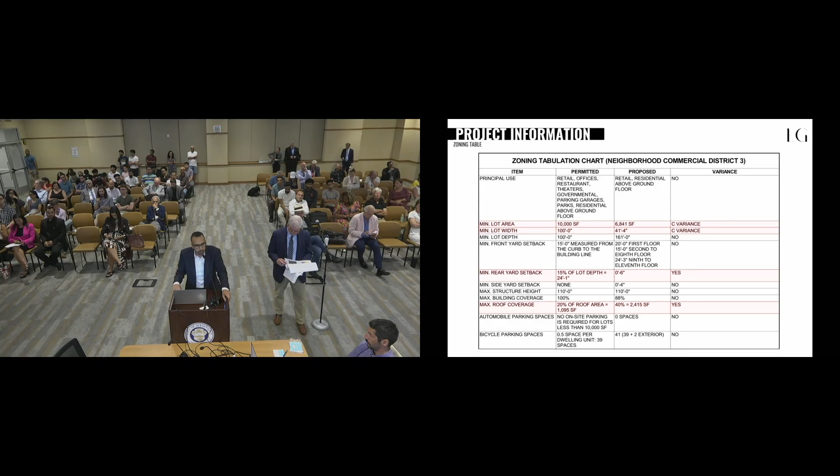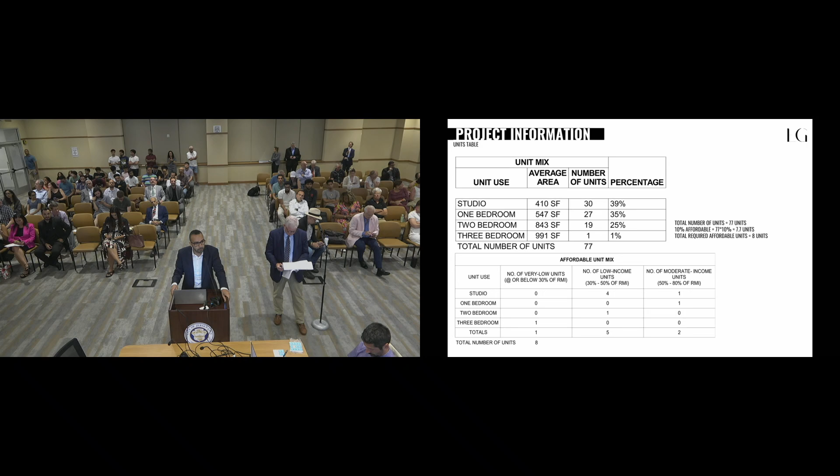So to get a good VRF system, we need condensing units, and those are going to be on the roof. The building is 77 units. This is the mix, and as Chuck mentioned, 10% now is part of the rear yard variance, so 8 affordable units will be in the building. This is something we already worked with the Affordable Housing Authority on, and the mix on the screen of the affordable units is what's approved.

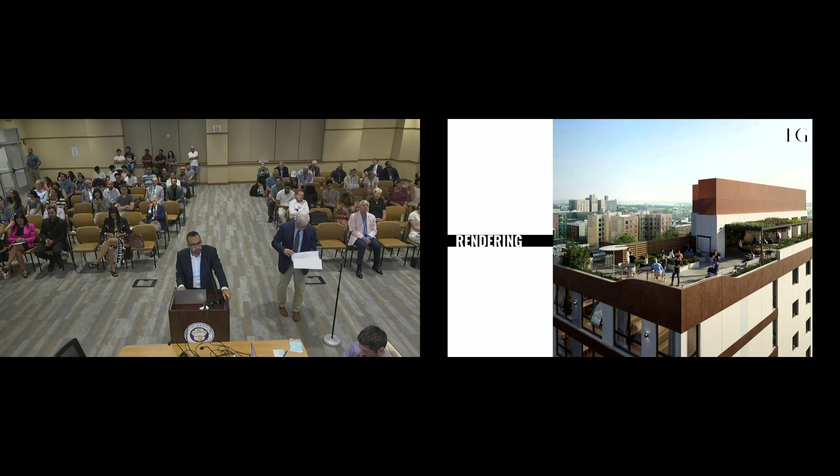This is the proposed rendering for the green roof, as well as the recreational space with the pergola here, and then the aluminum louvers for the mechanical spaces. There's also a wooden fence there; this is the mechanical space that's on the same level as the roof.

That's just another view for the pergola and the space that's designed under it.

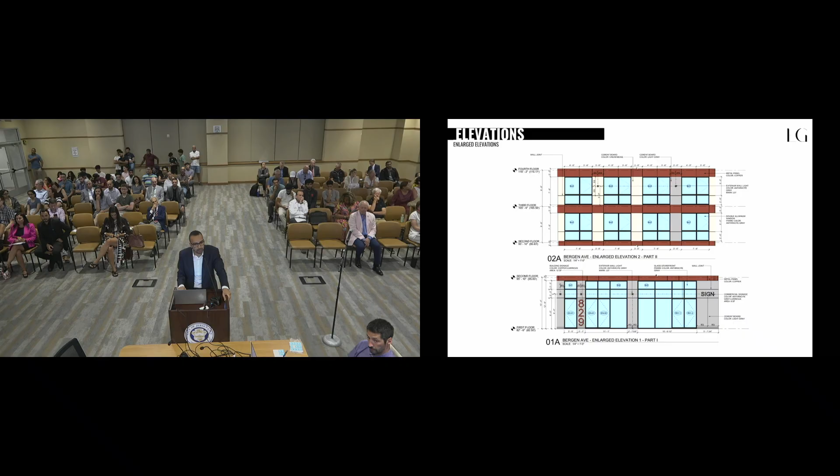This is the entrance to the building, and the first floor is right above it. On the left side where it says 829, that's the entrance of the building. On the right side where it says sign, that would be the space for the retail.

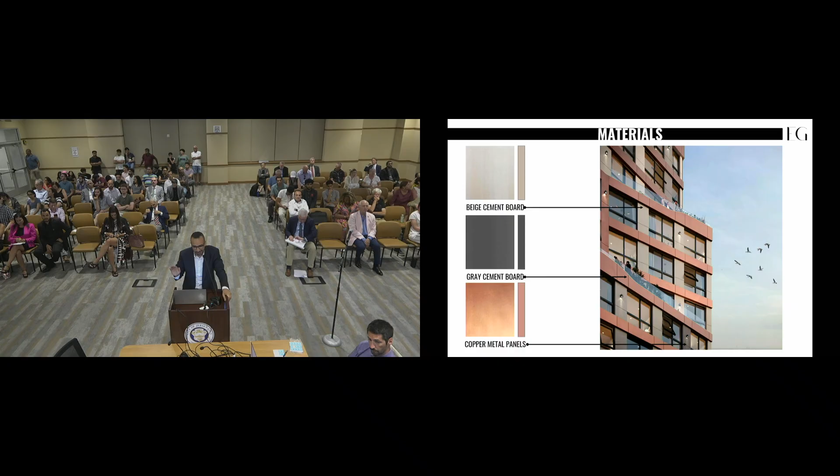The materials of the building - we're proposing the use of cement board on the front of the building in beige, and then gray cement board as well, and copper colored metal panels, not actual copper on the building. Although I would love it, but it's too expensive.

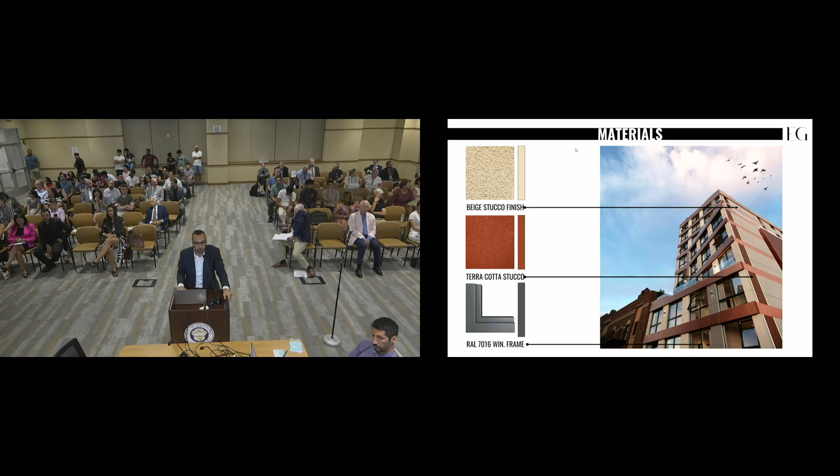Terracotta stucco on the sides, as well as the beige, mimicking the color, and then doing that pattern on the side of the facade. That is the facade that you see coming down Bergen Ave, because the building does angle out.

And this is a night view of the building, and I'm happy to take any questions if anybody has them.

Anyone have any questions? Yes - how many feet exist between the north side of the building and your project? The north side of the north property line and the building? Yeah. Zero - we're building up to the property line.

And so how far is that from the adjacent property? About 5 feet. So it will not touch the adjacent property? It will not touch the adjacent property. And on the south? On the south, both properties are basically touching. Usually you leave a seismic gap of 1 inch - that's what would be left.

On the south, but on the north side of the building, there's a 5-foot gap. On the north side, the Coptic church building is not on the property line - they have a 5-foot alleyway, so their building is removed further north. We're building property line to property line on both sides, correct.

Did you speak to the changes you made? If no other questions, I'd like to bring something else that Chuck just reminded me of. Sir, we're not in public yet, okay? We'll call you up. All right.

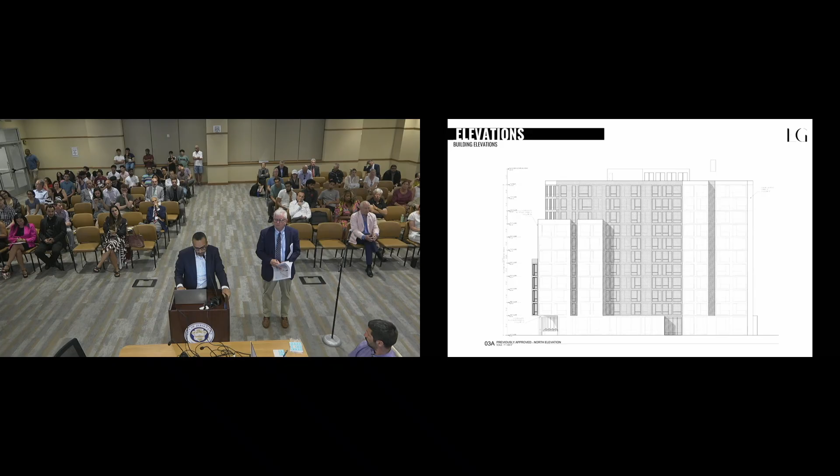How far would you say that is from the rear property line? About 24 feet. And that window well you were describing, that was there 24 feet from the rear property line, was there.

It was submitted like that, and then as part of discussions with our neighbors to the north, the Coptic Church, there was a request to put up a wall about 12 feet tall, to avoid issues with their youth activities in the back, like basketball, since they didn't want the ball to come in and break one of the windows. So we considered this, and we went back and actually just eliminated it entirely to make it safe and comfortable for everyone.

Another discussion we've had was the concern, which we totally understand, about the fire escape that exists on the side of the Coptic Church building right now. The church's building uses this as a means of egress. The concern voiced was that our window may be too close to it, so we wanted to avoid anything happening between them. We measured it and worked on the window, and it's over 5 feet from that stair, so we feel comfortable moving forward as is.

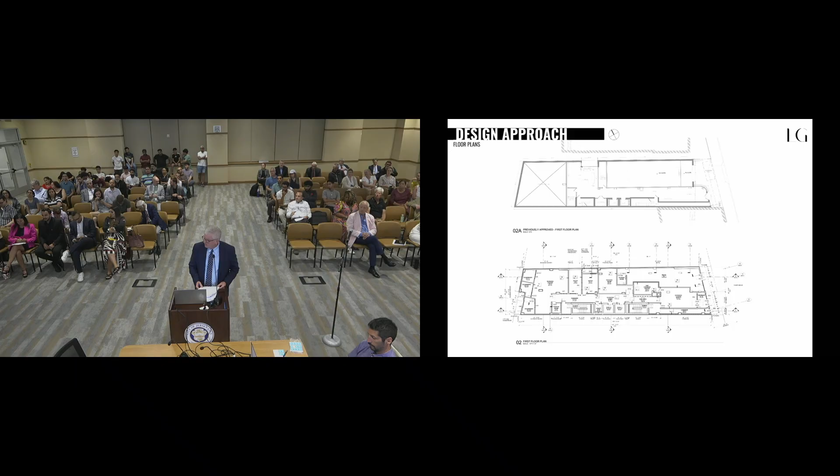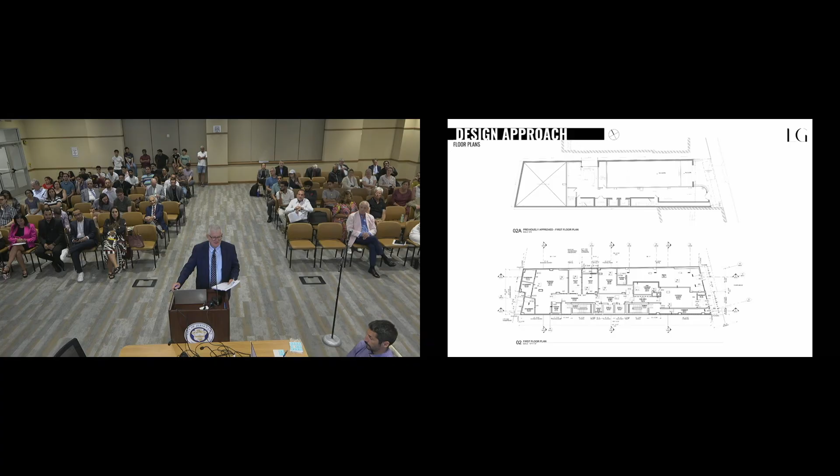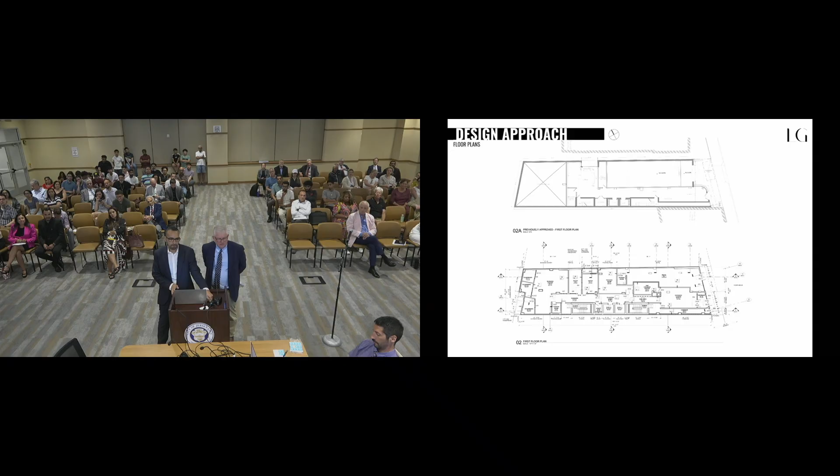I don't want to give anybody the false sense that being under old business means you're first, because what we're about to talk about is listed under old business. Understood. Okay. Thank you, Mr. Harrington.